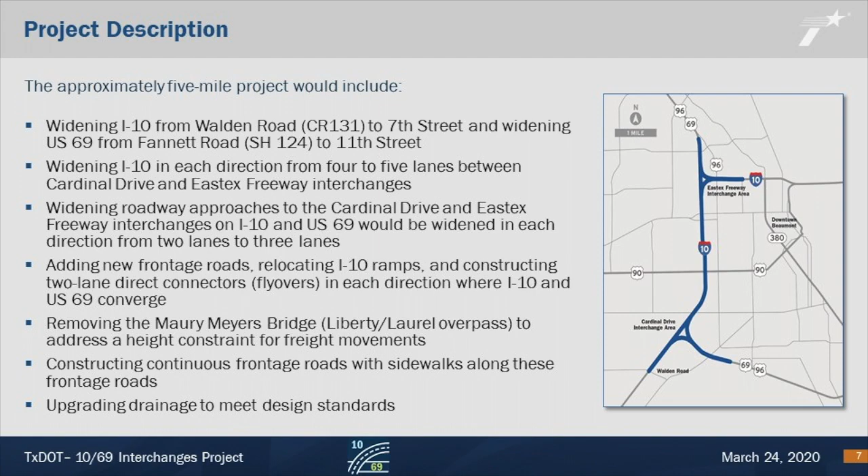Why is this proposed project needed? The purpose of the project is to alleviate congestion, to provide a more reliable transportation and evacuation route, to enhance connectivity and mobility, and to address safety. The two I-10 interchanges with US 69 in Beaumont are a critical part of the nation's strategic freight network and hurricane evacuation capacity in southeast Texas.

As you can see in the graphic, congestion is expected to increase based on our traffic predictions. As of today, 161,750 vehicles a day travel within the project area. By 2045, this number is expected to increase to an estimated 236,900 vehicles a day. Next, we would like to provide you with a summary of our public involvement efforts, giving you a quick look at how TxDOT used public feedback to guide the decision-making process.

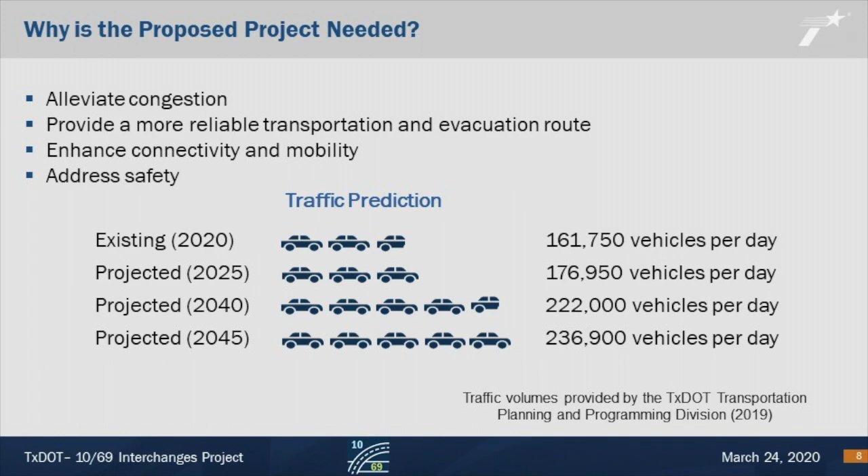TxDOT held the first open house public meeting on April 16, 2019 at the Beaumont Civic Center. The public meeting was held to inform the public of the proposed 10/69 Interchanges project and gather comments from the public, elected officials, and other interested stakeholders.

TxDOT provided a series of online surveys throughout the public involvement process, including during the first public meeting. In total, TxDOT received nearly 600 comments from the public as part of this outreach effort. The Beaumont District also received helpful feedback during the 2019 South Texas State Fair from the public visiting the TxDOT informational booth. TxDOT also learned that the public ranked reduced congestion as the #1 priority they wanted to address as part of project development.

In addition, TxDOT asked the public to prioritize ramp locations, and in that case, the College Street ramp ranked most important to preserve. Finally, TxDOT offered a series of proposed alternatives at the first meeting. Along with additional research and findings gathered during the environmental process, as well as this helpful public feedback, the Beaumont District narrowed the alternatives, which were presented at the second public meeting.

TxDOT held a second open house public meeting on September 17, 2019 at the Beaumont Civic Center. During this meeting, the Beaumont District continued to gather public feedback as well as introduce potential aesthetic concepts featured as part of another online survey provided before and during the public meeting. In total, TxDOT received more than 200 comments from the public as part of this outreach effort.

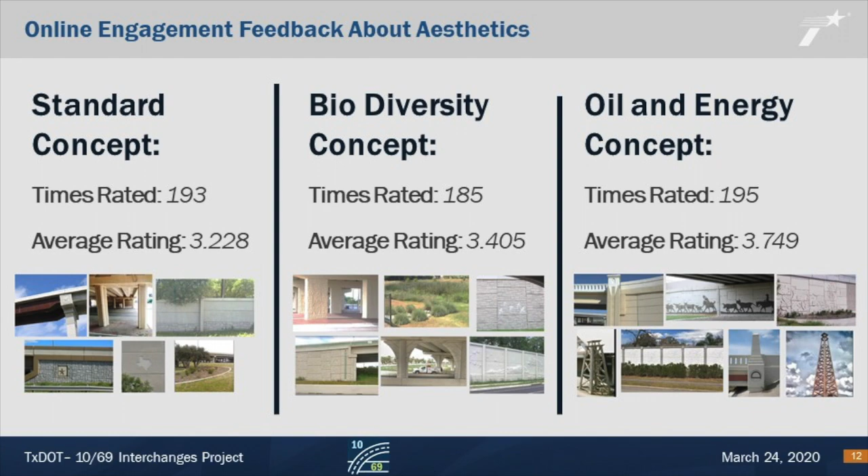From September 10, 2019 to October 11, 2019, TxDOT Beaumont District also received public input on the various aesthetic options being considered from the online survey. The oil and energy design concept ranked highest from the public.

In addition, TxDOT conducted many stakeholder meetings and one-on-one meetings during the public involvement process, such as the Bike and Pedestrian Stakeholder Meeting on August 22, 2019, ongoing communications with Christus Hospital, ongoing communications with the Spindletop Rotary Club regarding the annual Southeast Texas Soapbox Derby, along with Derby representatives, and ongoing communications with the Meyers family to discuss ways to continue the Maury Meyers legacy.

Let's switch gears now and talk about the proposed design changes.

The updated design includes widening I-10 from Walden Road, County Road 131, to 7th Street, and widening US 69 from Fannett Road, State Highway 124, to 11th Street. The roadway approaches to the Cardinal Drive and Eastex Freeway interchanges would be widened in each direction from 2 lanes to 3 lanes. You can view these images in more detail on the TxDOT website.

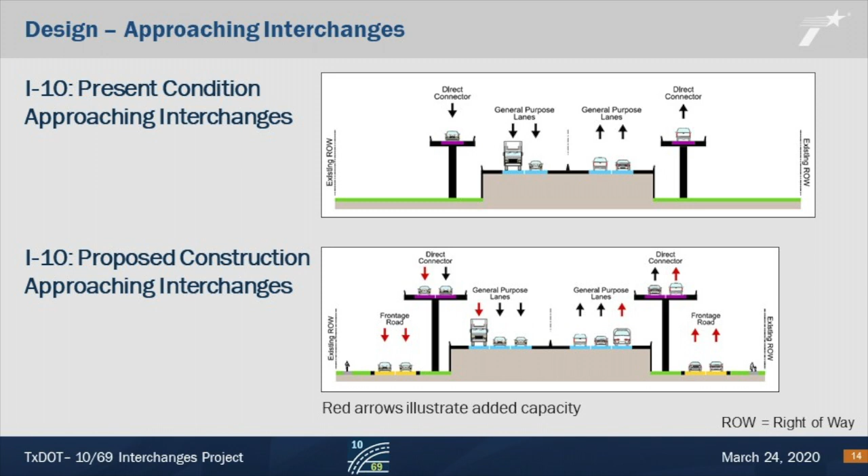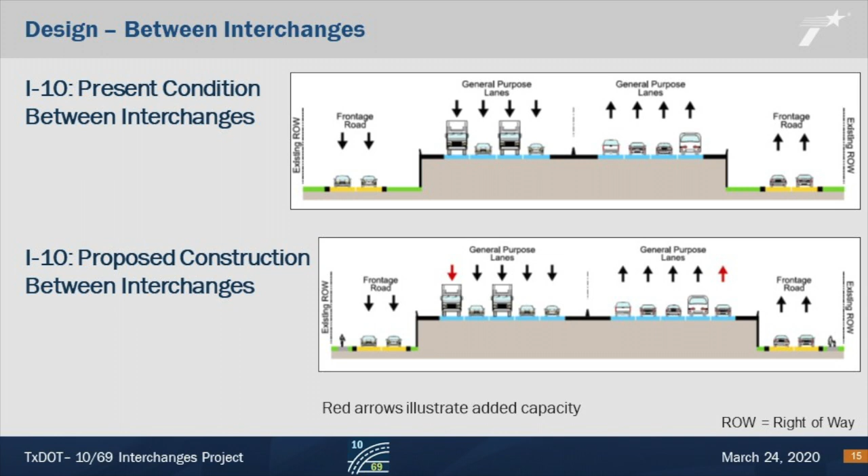Between the Cardinal Drive and Eastex Freeway interchanges, the roadway will be widened in each direction from 4 lanes to 5 lanes.

Over the course of the next few slides, we'll be focused on the project renderings, what the project will look like. We recognize this may be difficult to see here. You can view these renderings in more detail on the TxDOT website.

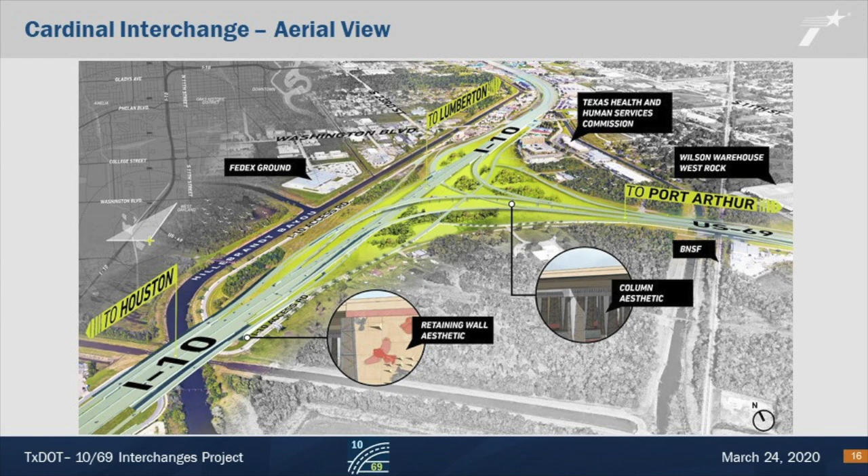This is showing the aerial view of the proposed Cardinal interchange, which includes the connection of frontage roads across Hillebrandt Bayou and through the interchange to provide more local connections. The proposed design also includes two-lane direct connectors between US 69 and I-10.

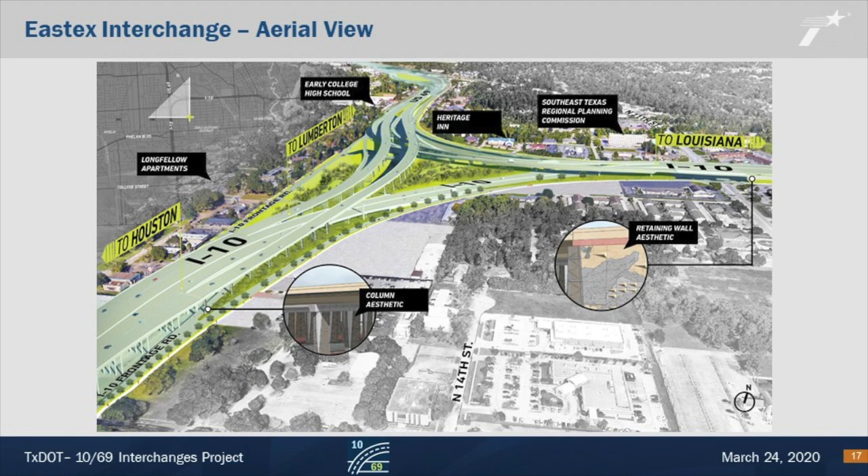The next few images we'll be showing you provide a proposed future look at the aesthetics design of the project area. This one in particular shows what a typical street crossing near the Cardinal interchange would potentially look like.

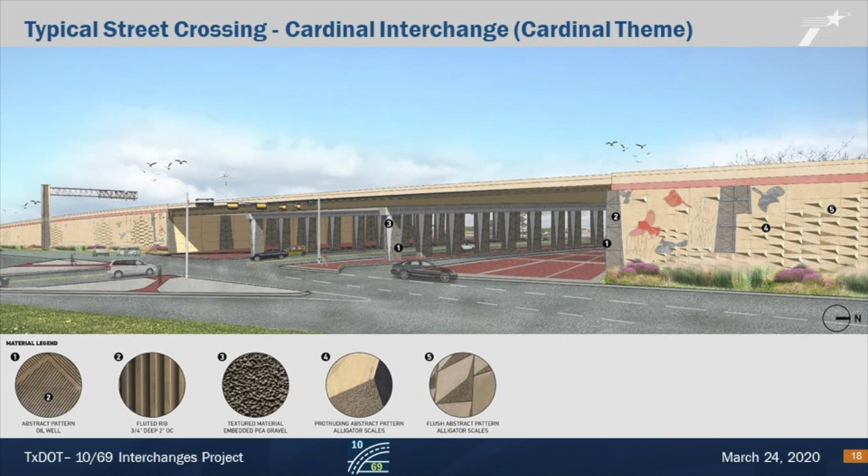We also wanted to point out that the public ranked oil and energy, as well as biodiversity themes, as the most popular aesthetic designs from our online surveys. Within each of the following designs, you'll see that these elements are included.

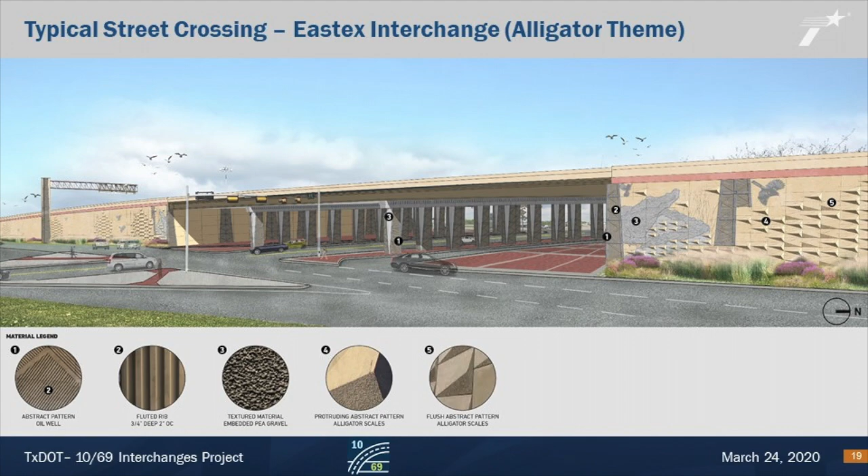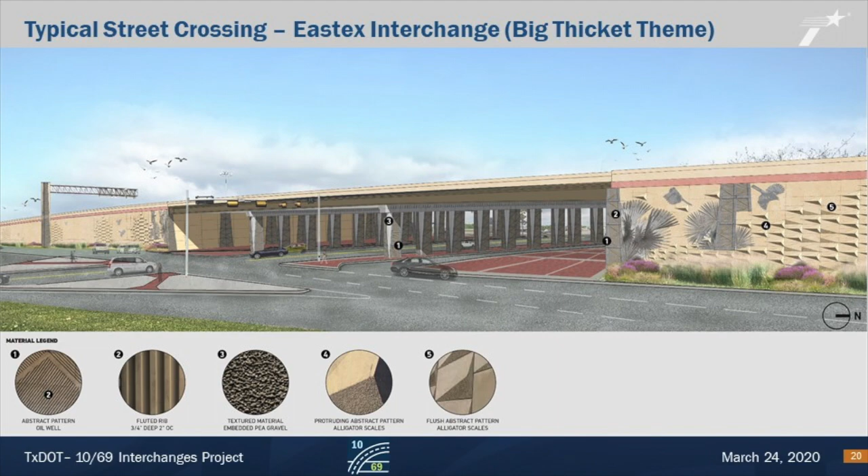Again, this image shows you a proposed future look at the aesthetics design of the project area. This view looks at a typical street crossing design at the Eastex interchange. This last aesthetic design theme also focuses on a typical street crossing at the Eastex interchange.

The proposed project also includes removing the Maury Meyers Bridge, Liberty Laurel overpass, to address the height constraint for freight. TxDOT continues discussion with the city of Beaumont and the Meyers family about the aesthetics plan to maintain the commemoration of this connection. TxDOT considered raising the Maury Meyers Bridge to accommodate the freight clearance.

However, additional impacts to adjacent properties and the local roadway would result from changing access to the bridge from intersecting streets. Such a change would also have eliminated access at 11th Street and Phelan Boulevard, since the bridge approaches would have to be extended and would end farther east and farther west, respectively.

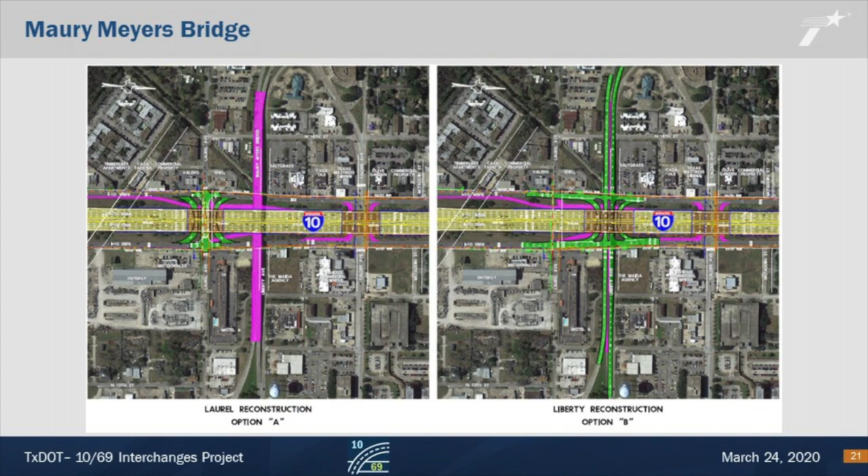Next, we'll show you a few renderings of the proposed I-10 structure in this area. This rendering shows I-10 over the original Maury Meyers Bridge area. The bridge rail and columns that were unique to the Maury Meyers Bridge have now been recreated on the proposed overpass.

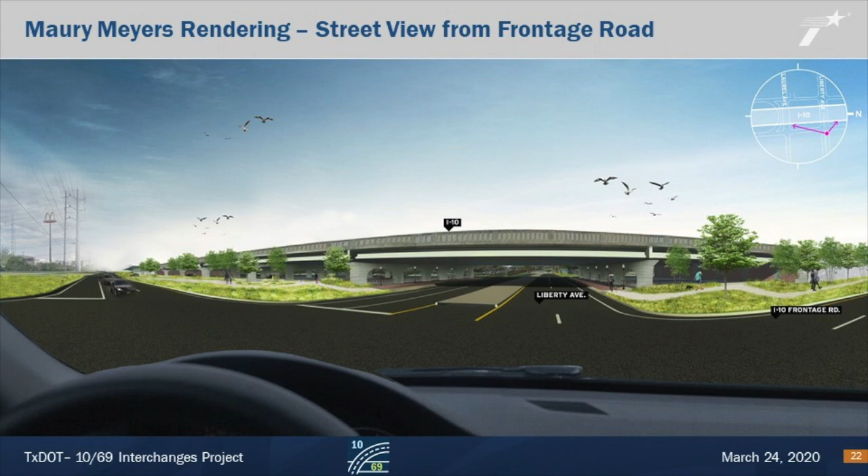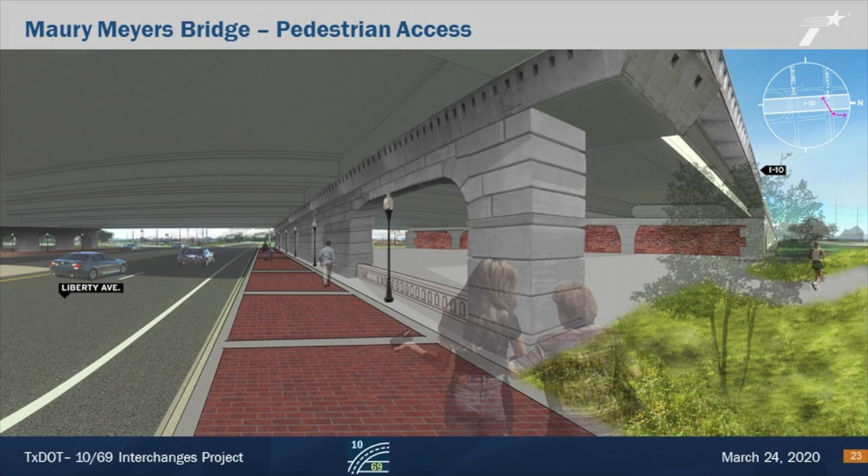This rendering shows the view underneath the proposed I-10 overpass with pedestrian connections. Also highlighted here are similar columns and lamp posts that were used on the original Maury Meyers Bridge. The proposed project is consistent with the SETRPC Metropolitan Planning Organization efforts.

This includes the Metropolitan Transportation Plan 2045 for the Jefferson Orange Hardin Regional Transportation Study Area and their 2019-2022 Transportation Improvement Program. The proposed project will be funded with a combination of federal and state funds for a total of approximately $500 million.

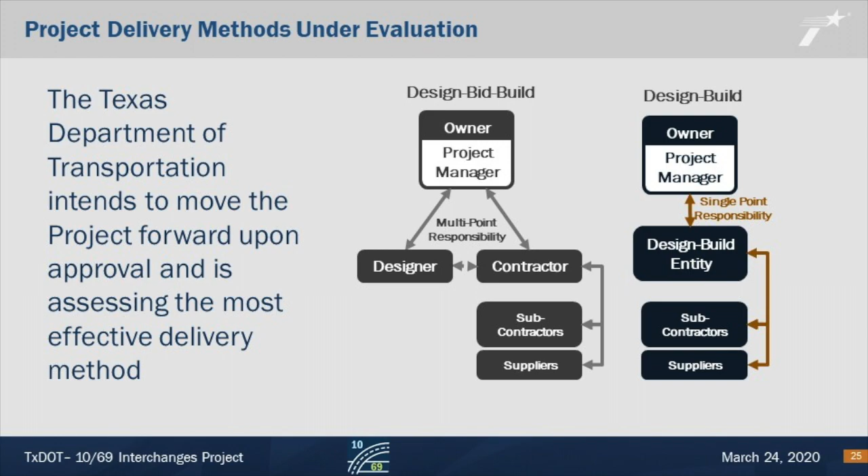Two project delivery methods are being evaluated, which include a design-bid-build process and a design-build process. The Texas Department of Transportation intends to move the project forward upon approval and is assessing the most effective delivery method.

The environmental study conducted for this project complies with the National Environmental Policy Act. In addition, the environmental review, consultation, and other actions required by applicable federal environmental laws for this project are being or have been carried out by TxDOT pursuant to 23 United States Code 327. This also includes a Memorandum of Understanding dated December 9, 2019, executed by the Federal Highway Administration and TxDOT.

The environmental study identified and assessed potential impacts by the proposed project to the natural and human environment, including air quality, archaeological resources, non-archaeological historic properties, community and social impacts, biological resources including threatened and endangered species and vegetation types, hazardous materials, indirect and cumulative effects, traffic noise, and water resources.

An environmental assessment was conducted for the proposed project. A copy of the environmental documents and technical reports available for public review can be found on the TxDOT website. As proposed, the project may impact less than an acre of wetlands.

These impacts will be authorized under a U.S. Army Corps of Engineers permit. Portions of the project area lie within the 100-year floodplain.

Design of this project will be conducted in accordance with TxDOT's Hydraulic Design Manual. Adherence to the TxDOT Hydraulic Design Manual ensures that this project will not result in a significant encroachment as defined by FHWA's rules.

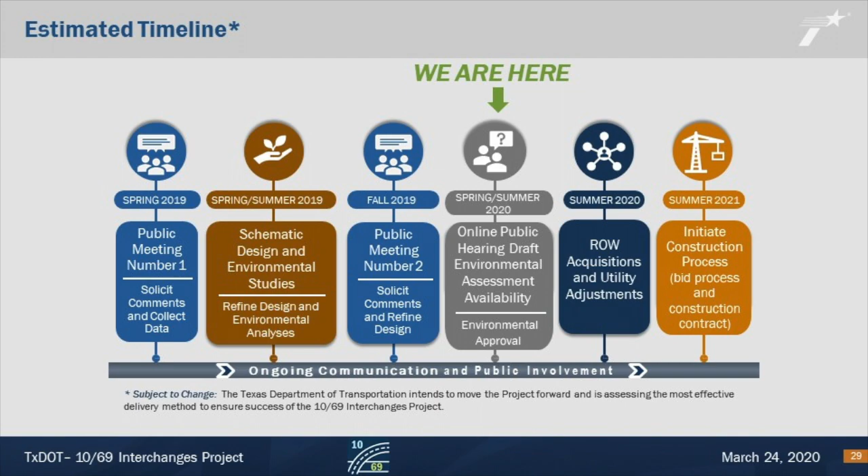Let's recap how you can submit your comments. Given our current COVID-19 situation, the Beaumont District is asking the public to provide their comments in the following ways. Email your comments to bmtprojects@txdot.gov.

Mail your comments to TxDOT Project Manager, Texas Department of Transportation, 8350 Eastex Freeway, Beaumont, Texas 77708. Submit your comments online. Visit www.txdot.gov. In the Search TxDOT box in the upper right-hand corner, enter 10/69 Interchanges Online Public Hearing. Click on the Submit Your Comments button at the top right of the page or click on the email link at the bottom of the page.

Most importantly, please be sure to submit your comments no later than Wednesday, April 8, 2020, which is 15 days after the original March 24, 2020 website posted date. The responses to your comments submitted during the comment period will be included in the online public hearing summary report. This report will be posted to the TxDOT website within the next few months.

We encourage the public to stay informed about the project in the following ways. First, sign up to receive email updates. Visit www.txdot.gov and in the upper right-hand corner, enter 10/69 Interchanges Project in the search box.

Click on the project page and then click on the upper right-hand button called Subscribe to Updates. When there is a project update, an email will be sent to you. We also invite you to view the various project materials on the TxDOT website, for example, detailed schematics that allow you to see the design up close, available online.